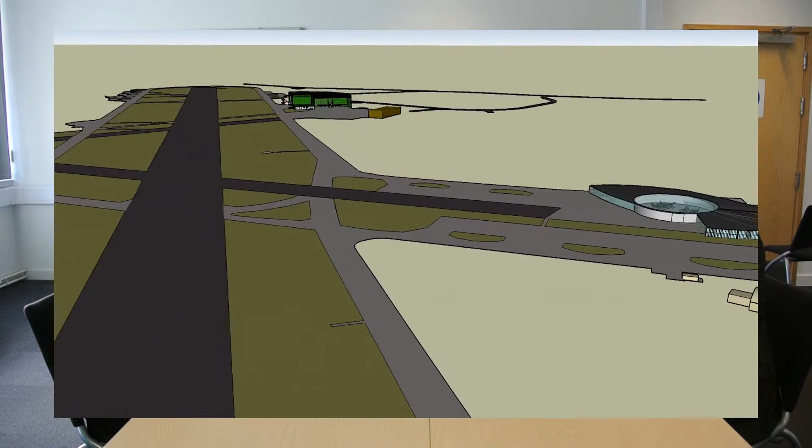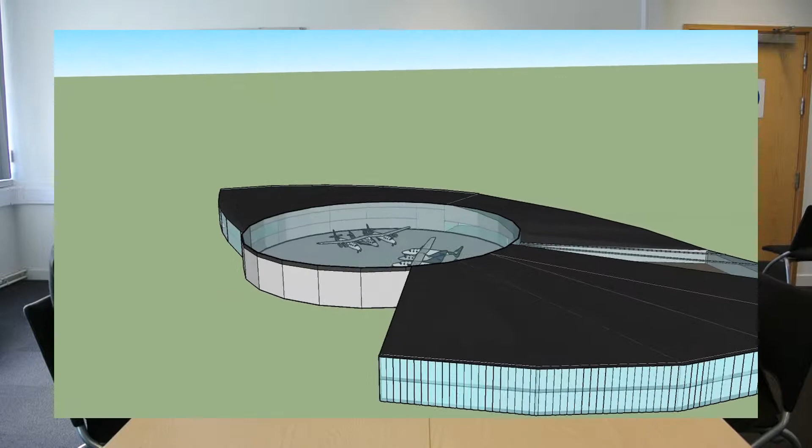So let's look at our designs. 2 detailed designs and 6 outline designs have been produced. First, in detail, the spaceport itself. The spaceport complex is approximately 25,000 square meters, which is in line with the current Spaceport America. The spaceport complex has been designed to Eurocode 1, Actions on Structures, Eurocode 2, Design of Concrete Structures, Eurocode 3, Design of Steel Structures, Eurocode 4, Design of Composite Steel and Concrete Structures, and Eurocode 6, Design of Masonry Structures. In addition to these standards, the complex has been designed to achieve a BREEAM Outstanding rating.

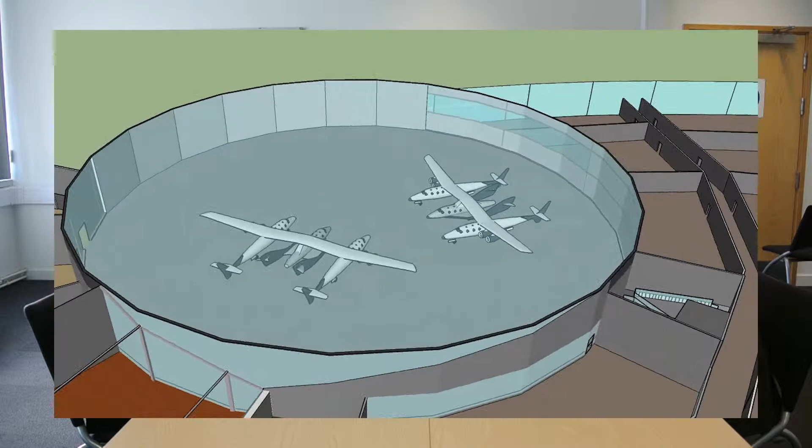Within the complex, there is a reception area, including check-in desks, a hangar with approximately 5,000 square meters of open bays to accommodate 2 of Virgin Galactic's White Knight 2s. This hangar will utilize a set of horizontal leaf sliding doors for access. The span of the hangar entrance is broken up into staggered sections so that the leaves can slide between one another when fully open. The doors sit on hardened rails embedded into the concrete, allowing them to move freely sideways.

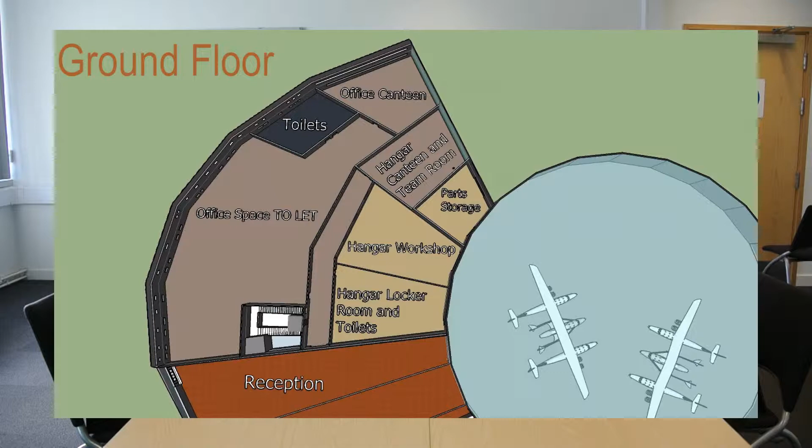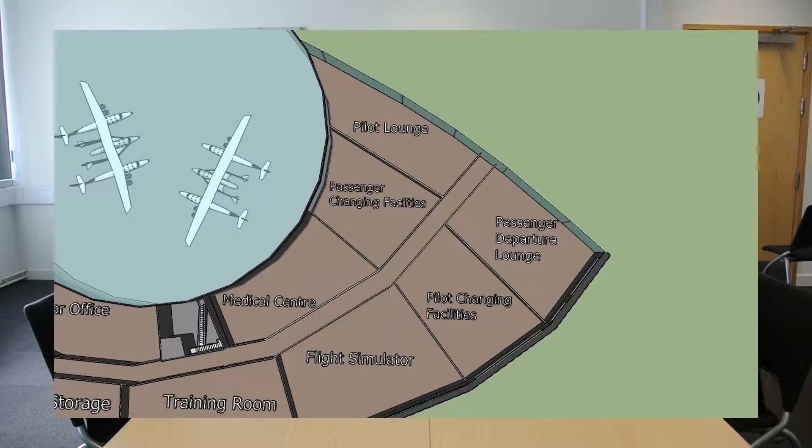The facility will also include office space for spaceport staff and spaceflight operators, as well as training facilities, lecture rooms, and a flight simulator. The departure lounge will have views of the sea and runway. The astronauts' guests may stay here during the spaceflight. There is a high-quality restaurant with views of the sea and runway, which will be open to the public when not in use by passengers. The underground car park has capacity for 80 vehicles.

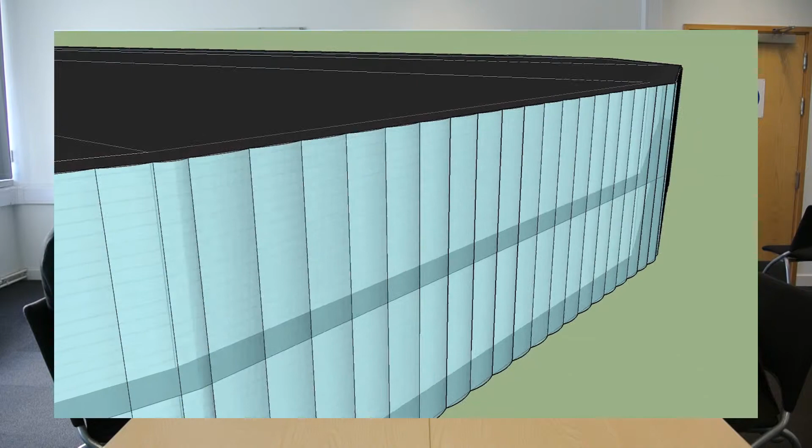To achieve the desired BREEAM rating, several sustainable techniques have been employed on the spaceport. ETFE will be used as an outer skin to form a 2-layer facade. The materials will have the appearance of a multi-layered cushion and will help keep the building insulated and also ventilated due to the mechanical vents at particular levels. Within the ETFE will be lights which will change colour and create patterns on the outside of the spaceport. There is a maintenance walkway between the ETFE and the inner walls and the windows of the spaceport.

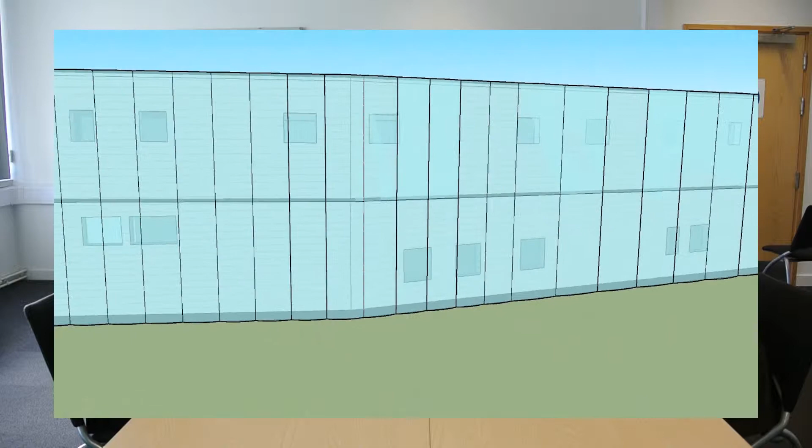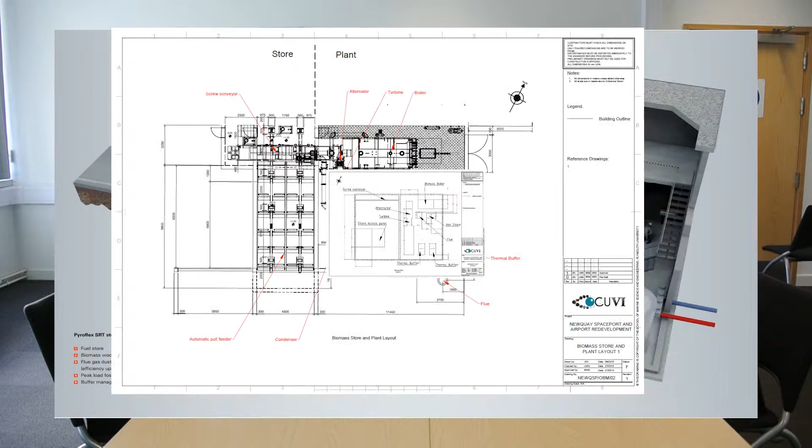This concludes our spaceport design, which is our main deliverable and flagship element. However, as part of this project, there are several other designs to look at. The second detailed design for this project is focused on the installation of a 2 megawatt biomass plant on site. The plant will be a considerable step in reducing the infrastructure's carbon footprint and thus helping to achieve Newquay airport's carbon neutrality goal. The biomass CHP plant has been designed to provide a constant baseload of power to the building throughout the entire year, and in the event of excess electricity being produced, the airport can sell it back to the national grid, earning the airport revenue.

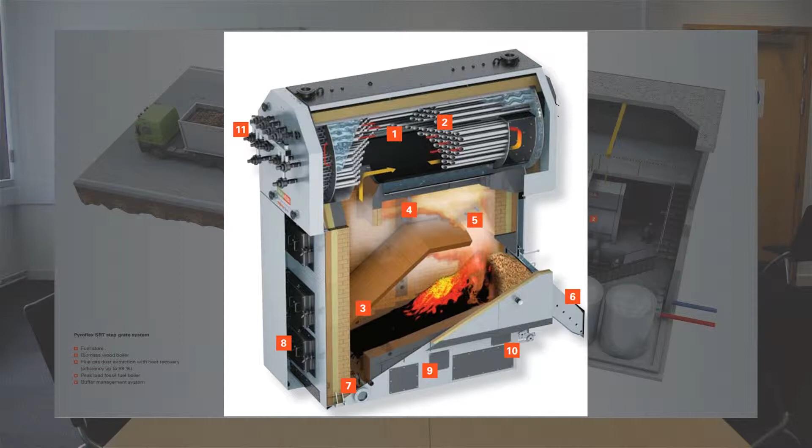The plant is composed of several different components. The first is a 2 megawatt Mawera biomass boiler. The boiler is capable of burning wood pellets, bark, green cuttings, and wood chips. The heat energy produced in the boiler passes through a Siemens Organic Rankine cycle turbine and generator. A Siemens condenser recovers heat from the exhaust gases, which can then be distributed around site.

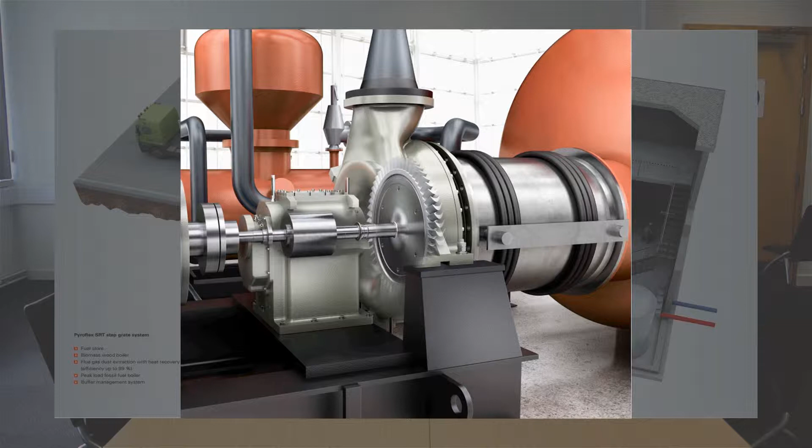A multi-stage combustion gas filtration system removes the majority of particulates from the boiler exhaust gases before they are released into the atmosphere. The whole complex is located underground and has a hinged access door for restocking fuel.

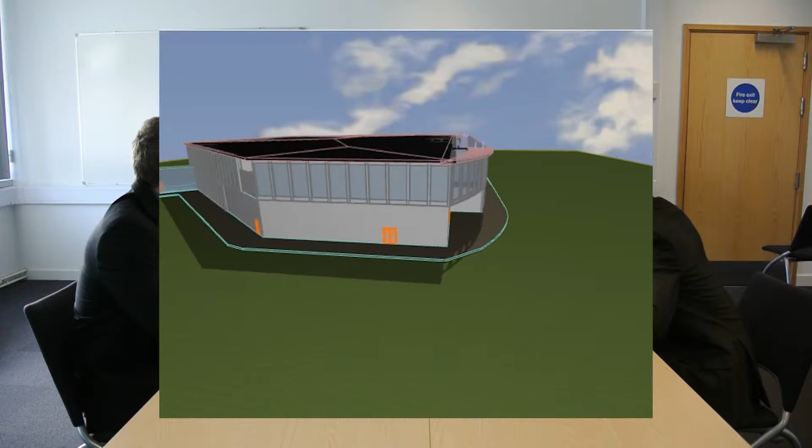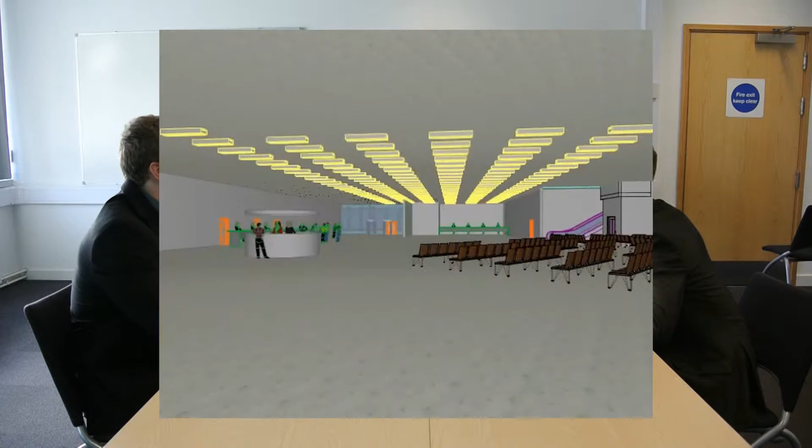The terminal building is delivered as an outline design element of the project, as the client wishes to build it once the current terminal is insufficient to support the forecasted demand. The building is designed to Eurocode standards and against assessment criteria that advocate sustainable development to provide energy-efficient, environmentally sound solutions. This is ensured by following a design process that aims to evaluate the responsiveness of the design to the needs of the project stakeholders and the community of Cornwall. The design concept is coherent with the other elements of the master plan provided by OCUVI.

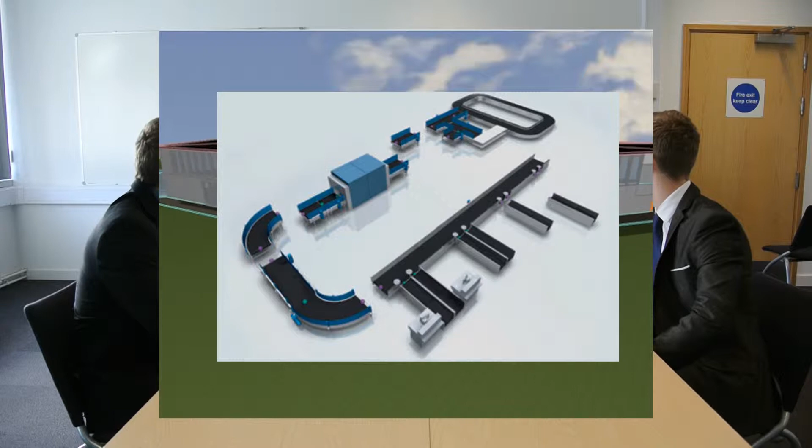Baggage handling system is a major component of the airport terminal. Its effectiveness will have a large influence on the functioning and efficiency of the entire airport. A C-Bag smart system developed by Siemens has been selected to perform this role. Its capacity of 1,500 bags an hour and 4 million passengers per year more than covers the airport's short and long-term growth targets. This system's all-in-one modular design enables easy modification and great flexibility to changing demands and circumstances.

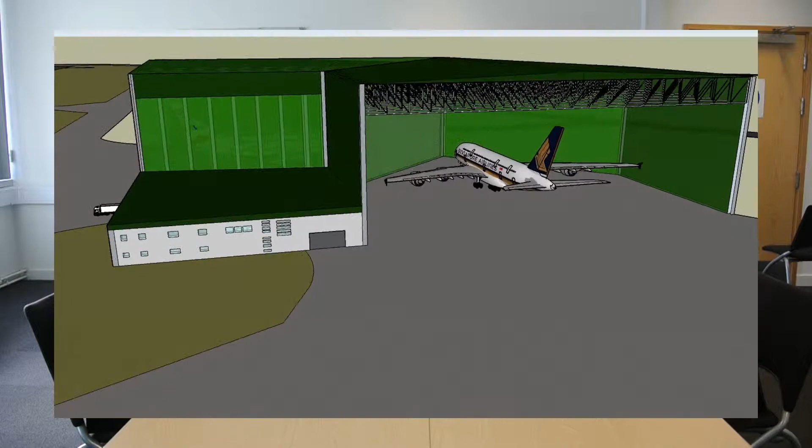In a bid to increase revenue, OCUVI have produced an outline design for a large hangar complex that can accommodate 2 Airbus A380s. 2 jointed hangars combine to create an innovative new shape that reduces the amount of disused space. The reception, hangar workshops, parts, storage and facilities lie between the 2 hangars. Part of the adjacent building has also been designated as office space, which can be let out at a competitive price.

The complex is constructed from large steel columns supporting a collection of steel trusses which span up to 95 metres. The hangars are clad in green, translucent polycarbonate sheets that reduce the need for artificial light. Each hangar will have a Megadoor VL3190 door, allowing the world's largest planes comfortable access to a secure and protected environment.

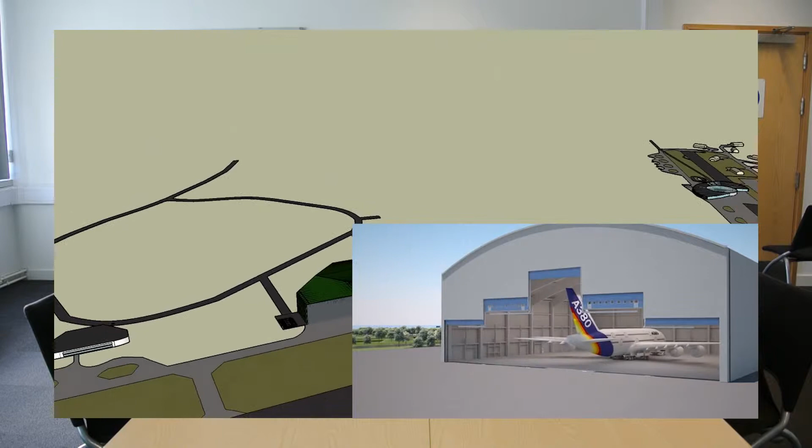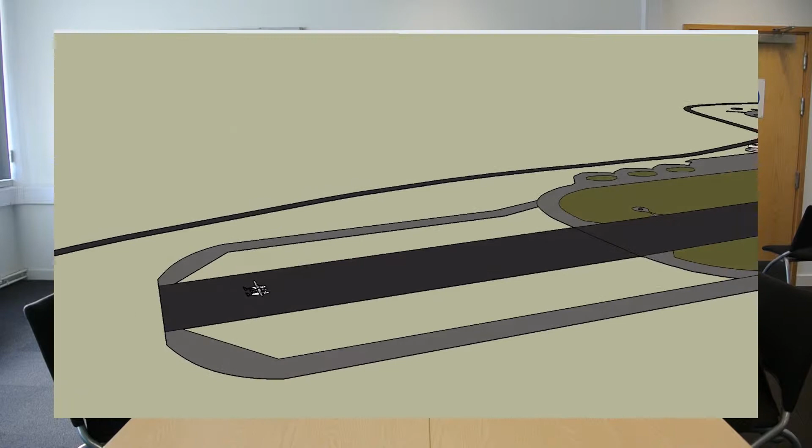As part of this project, there is a requirement for Newquay's runway to be extended to 3,000 metres in order to allow space-capable flights, as well as larger commercial flights, to be able to take off and land, therefore bringing in more revenue and business to the airport in Cornwall. So we have produced an outline design for a runway extension.

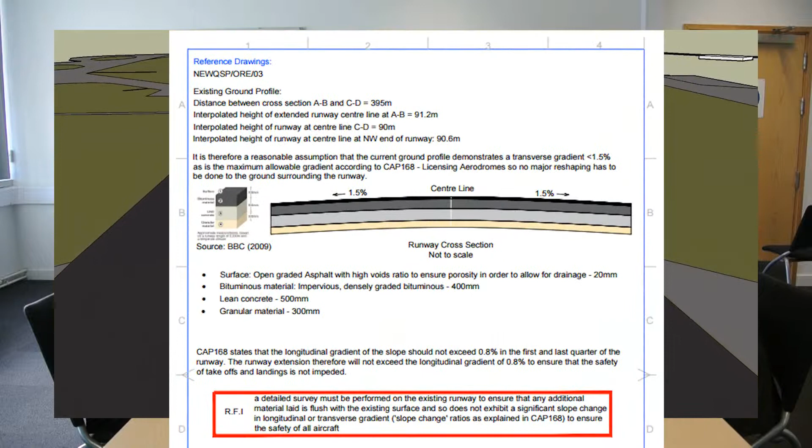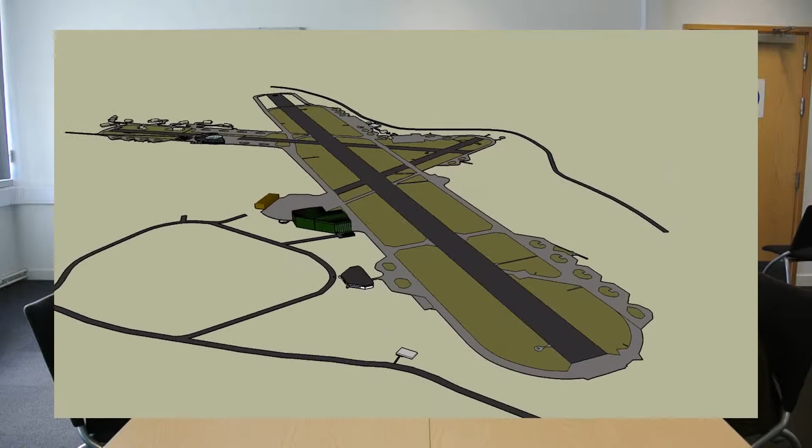A typical runway cross-section includes open graded pervious asphalt, allowing for drainage, a bituminous material, a lean concrete and a granular base. This runway will have a longitudinal gradient no greater than 0.8% to ensure it is safe to land on. This has been designed according to CAP 168.

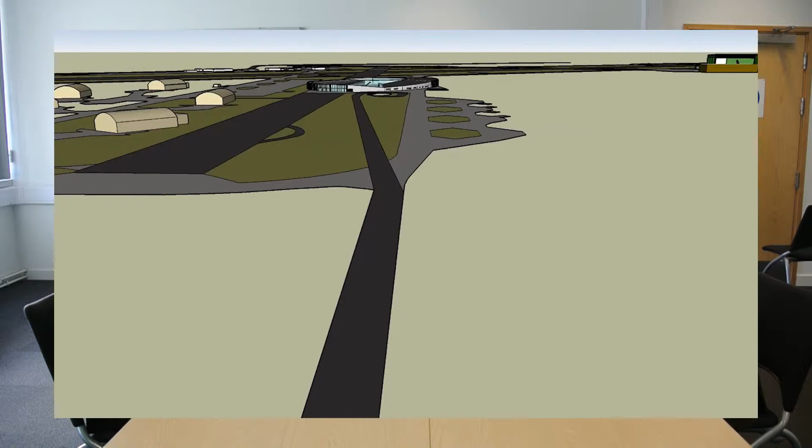There is a requirement to provide a road system allowing new builds to be connected to public access. This will ensure our facility is easily accessible to its users. A typical cross-section as given by the Highways Agency in the DMRB will be used, as well as the standard road markings and signage.

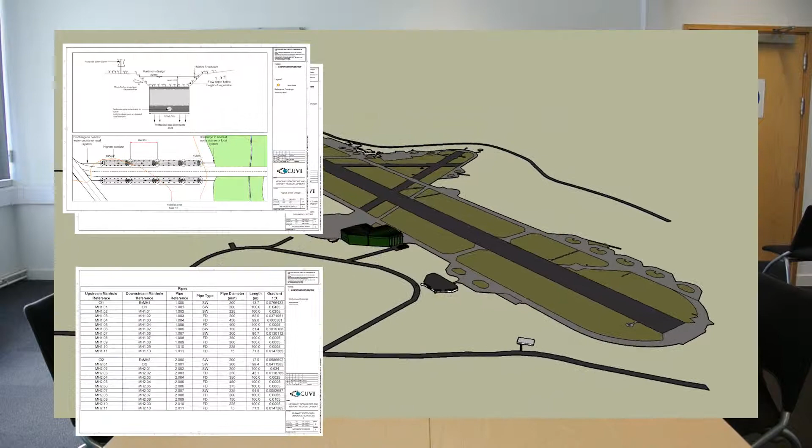A drainage scheme has been produced to ensure that surface water on the runways and all the new builds is managed to mitigate the impact of flooding. A swale along the terminal access road and a system of filter drains surrounding the new runway extension have been designed in detail. The other drainage systems are shown in outline.

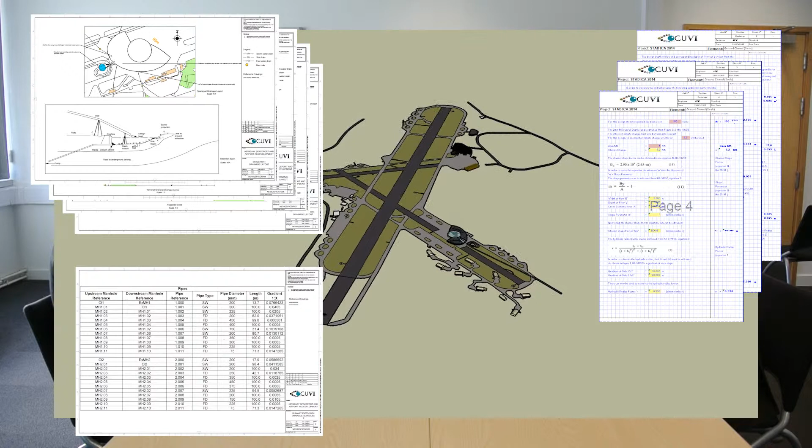These include the use of slot drains around the terminal and a detention basin feeding into a grey water system for the spaceport. These have been produced in line with the DMRB and using guidance available in the SUDS manual, as well as the tables for hydraulic design of pipes, sewers and channels.

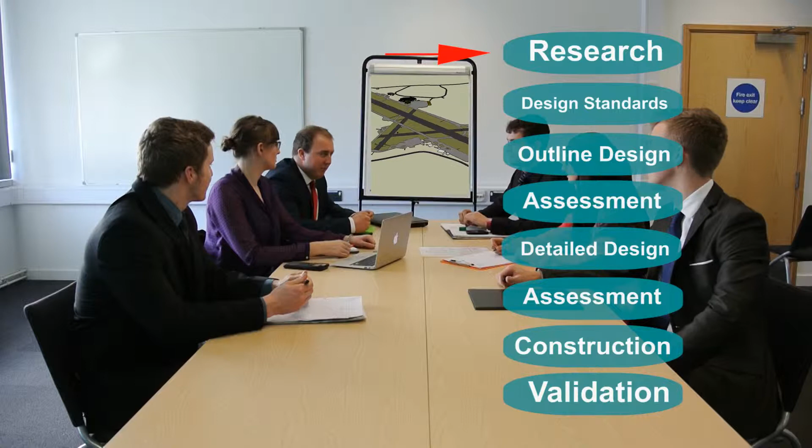CUVI has carried out the design of the redevelopment of Newquay Airport to the relevant European and British standards, but also to the environmental standard of BREEAM Excellent, through the planning of using locally sourced materials, rainwater harvesting and renewable energy.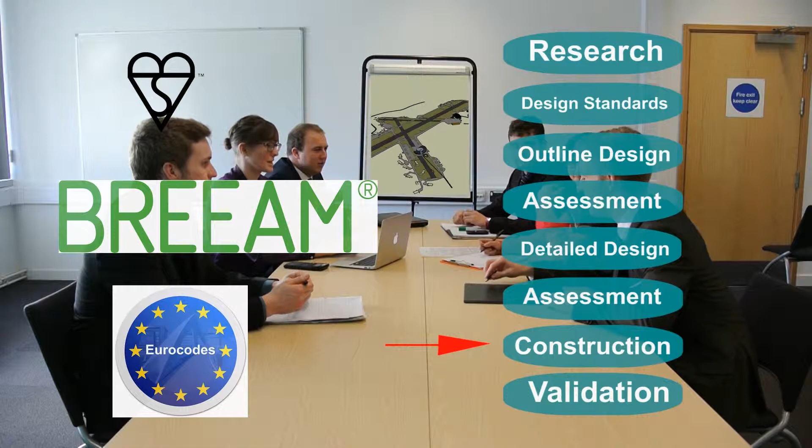During the construction stage, to ensure the approved designs are constructed to the correct standards, 2 OCUVI personnel will oversee the construction process on site and liaise with the client and the contractor throughout this period. This will guarantee that our high standards are met and that the designs are followed, ensuring that the project is constructed to specification, and will also minimise any time for solving design issues which may arise during construction.

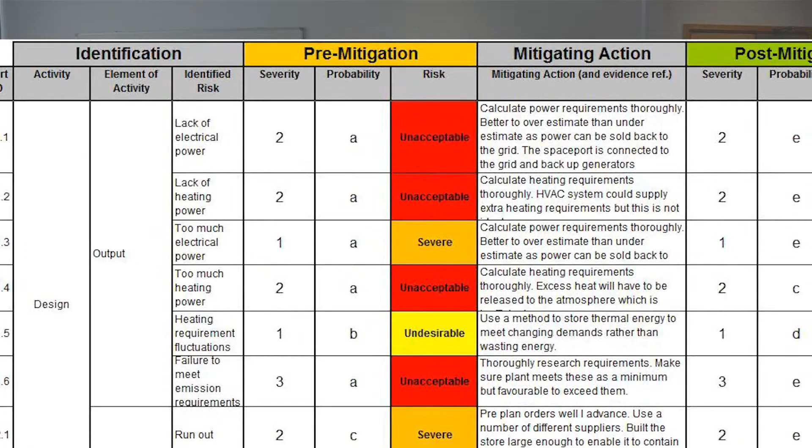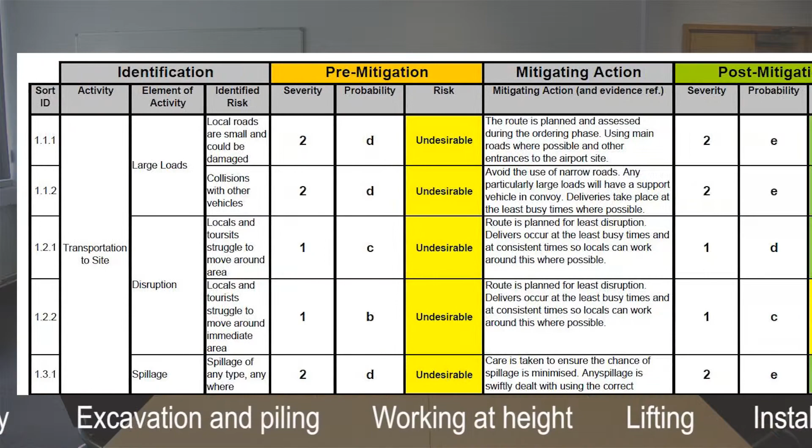A failure mode effect and criticality analysis was used during the design phase of the biomass plant, focusing on its design, construction and operation. This will remove or mitigate any potential risks associated with the plant to deliver a functional and successful design solution. Risk management has been a key part of OCUVI's overall project management strategy throughout this redevelopment project. Systems have been installed for adding new risks along with a Risk Register to document, assess and provide mitigating actions to any risks that may arise throughout the completion of the project.

Several Gantt charts have been produced along the design phase. The initial feasibility study, design specification and project execution plan on how to deliver the specification took 2 months. The design process was initiated at the start of January 2015. The total design of each project element took 3 months. There will be a consultation period of 3 months beginning in September 2015. Any changes required and updating of structural calculations has a contingency period of also 3 months. The project will go out for tender for a timescale of 95 days at the end of May 2016.

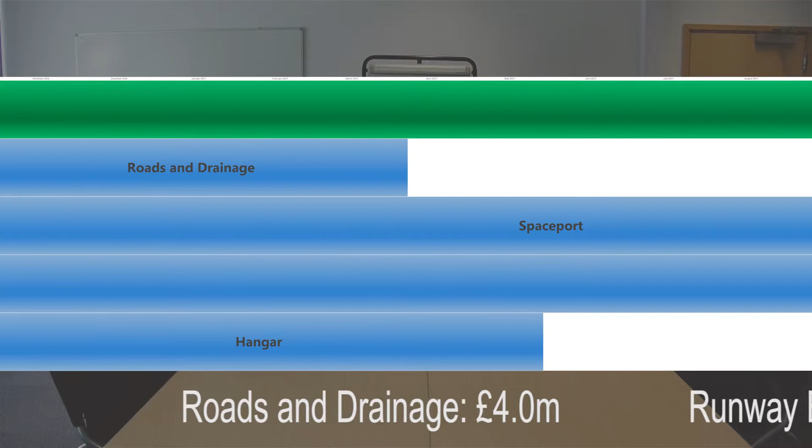Construction will begin in October 2016 and take approximately 1.5 years. The roads and drainage will take 4 months and cost just less than £4 million. The runway extension will take 6 months and cost £33 million. The spaceport complex construction, which includes the biomass plant, will take 10.5 months, costing £67 million. The airport terminal, including the baggage handling construction, will take 18 months and cost around £61 million. Construction of the new maintenance hangar will take 5 months, costing £35 million.

Including OCUVI's 4.5% fee, inflation, a regional adjustment factor, and a contingency of 10%, the total cost of the redevelopment project is £256.5 million. OCUVI has generated some business return and investment predictions.

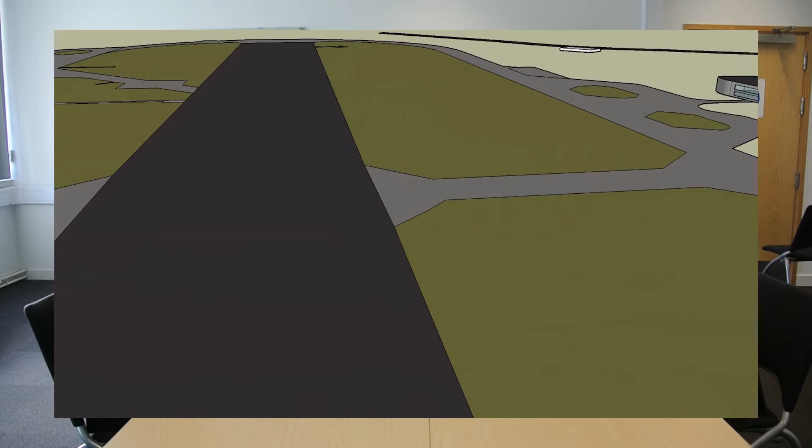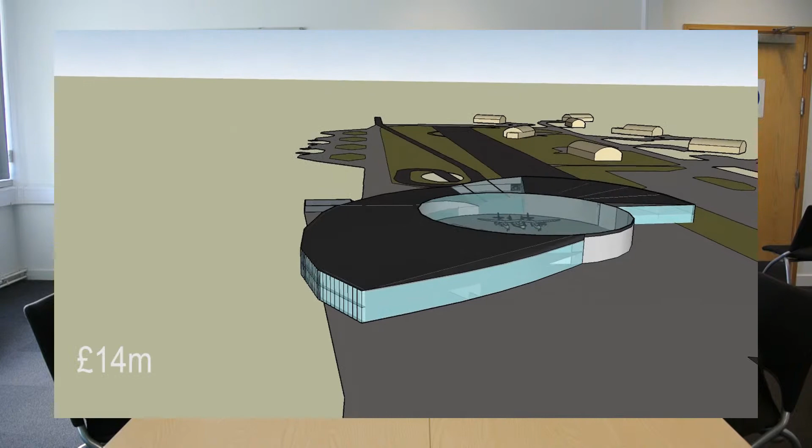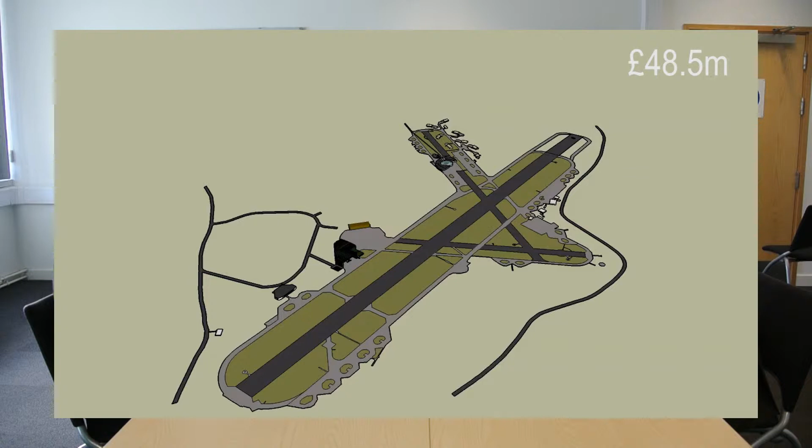The main generated revenue for Newquay's airport will come from the airport terminal, which will retail £2.1 million per annum, and the airlines, who will be charged over £28 million each year. The hangar spaces and office spaces will earn over £1 million every year. The biomass plant should earn around £600,000 in savings and selling back to the national grid. The spaceport will earn £14 million a year, charging the flight providers. Additional tourism should bring in £700,000. The total revenue is approximately £48.5 million. With running costs of £8 million a year, the project will break even after approximately 6.5 years.

These are the primary stakeholders who are currently involved with Newquay Airport and will be involved if the project goes ahead. Cornwall Council is the largest stakeholder, as it is currently the owner and operator of Newquay Airport. The needs of the stakeholders have been addressed and achieved through the project's creation of sustainable designs, such as the sustainable drainage schemes, increased capacity of the airport, an improvement on the current facilities, the planned redevelopment on brownfield sites, the creation of jobs, increased revenue for the airport's owners, and potential for educational opportunities for Cornwall schools and colleges.

A full SWOT analysis has been performed for this project. However, in brief, its major strengths include the large amount of government funding available and the fact that it was shortlisted as a potential British site and is the only one of 6 to be located in England. However, its major potential weakness is that there is currently no established client base for space tourism, but that is because it's the first in the UK and so presents a large opportunity for being a turnkey project. That is provided we can get the additional funding required over the other shortlisted sites.

This project will pave the way for an entire new space-based industry within the UK, as well as bringing in much-needed investment to the local area. Our designs will make OCUVI one of the region's leading consultants in spaceport engineering and design, and the project presents a unique opportunity to invest in our vision.